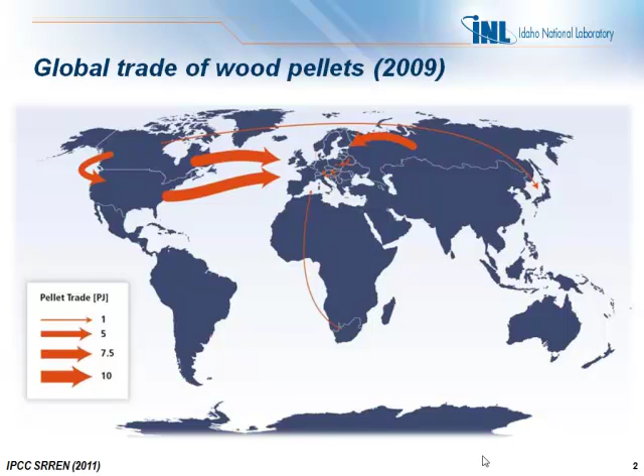So what does that mean for us in the U.S.? Because it's a significant resource leaving our shores and going overseas to support their energy needs. Well, I think the obvious reason for that is that, as talked about by previous speakers, we don't have policy in place necessarily or subsidies in place to support that market. And without the support of those subsidies, that pellet industry just doesn't pencil out in the U.S. And even though they've overcome some of the barriers, they haven't overcome that final cost barrier.

But as we talk about biomass in general, there are certain things that we have to understand that make biomass limited in terms of market. And I think all of the speakers talked about many of these topics. Handling attributes and conversion attributes. So we deal with both. We deal with the first directly in terms of logistics and how do we tackle biomass, reformat it, engineer it, if you will, into a product that can be used in power or fuels production or chemical production.

But we also look at the conversion attributes and the numbers that are listed there, because we need to understand, or the conversion side of the house needs to understand, that what we do to the biomass can affect their process, either favorably or not favorably.

And so we have strong ties with our other national labs, sister labs that do conversion, and other agencies that do conversion work to now start to put standards or put markers out there that we're trying to hit, targets to make sure that the conversion process fits within what we're capable of creating for them. And it's one of these where eventually we'll join in the middle and we'll have a solution to that problem. But there's many things listed there that prevent us from doing that.

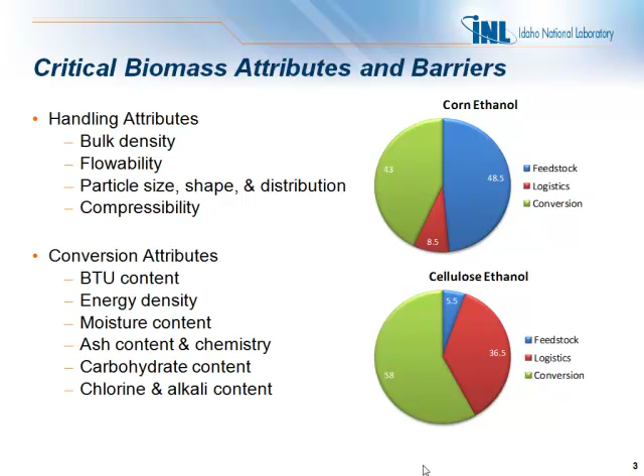And so the issues that we are facing is how do we squeeze more out of that 36.5%, and how does the conversion squeeze more out of their 58% to give more back to the growers? And this piece here is our logistics challenge that we're trying to find solutions to, and it all encompasses these barriers at very high levels. There's more nested under those, of course.

So what do we look at today? And again, my apologies, Jared and I, the program since 2000 had a much stronger background in the ag residue. It started because we were buttoned up against the corn ethanol, and we were trying to make more value add out of the corn ethanol businesses. So this integrated biorefinery was the starting place. And as we move forward, the forest products industry is more mature in the sense of utilizing its feedstocks for higher value products than, say, the wheat straw or the corn stover or other things. And so there were higher barriers, and we come from that background.

But as we move into the woody arena more, these same types of philosophies still hold true, and we're developing the patterns, as Jared pointed out, both in modeling and in research data to support where we're headed with this. So in this graphic, and Jared showed this and talked a little bit about what we're doing, in a conventional system we use this as a baseline because we have a forage industry that moves residues around for livestock, and we have a wood products industry and to some degree the pulping industry and other things that move forest products.

Most of those are higher dollar merchandisable saw logs or timber or pulp. But in terms of how do you access the material and bring it to a location, the baselines exist. We knew that they existed, and we have sort of what it looks like in a snapshot.

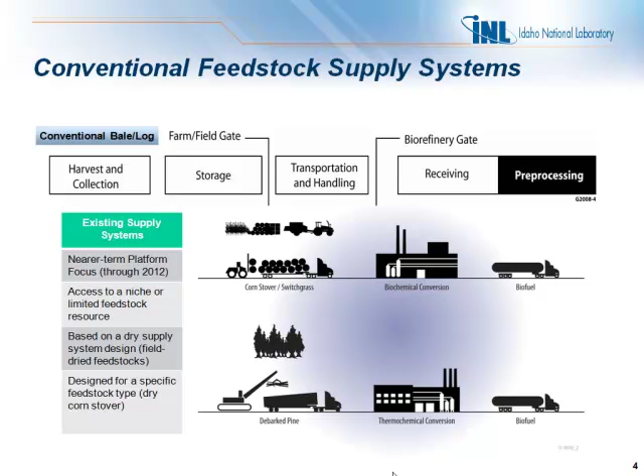What we're changing now as we move forward in terms of thinking about the logistics is we're removing pre-processing for the most part from the biorefinery gate and shifting it forward so that more of that operation occurs around the farm and field gates. And in doing so, you start to tackle the issues of bulk density, energy density, some of those major transportation barriers, and also stability, such as moisture management, and even some of your quality. You can start to attack that there.

And so we talked about biochar, some of the products that come in, and imagine the logistics. If you haul everything to some biorefinery and you make a value-add product that really belongs back on the soil, back with the growers, you have to transport all that back to the growers, and so you're causing another logistical issue. And so the philosophy is that right here, two things: very low bulk density, very broad diversity of feedstocks.

Who better to deal with diversity of feedstocks than the landowners? They rotate crops, they rotate species, they understand their land, so they handle diversity on a daily, yearly basis. So we leave the diversity up front, and we start to funnel the process right through here, where we start to stabilize, densify, add value, take products off that might have value to go back, shorter distance. This transport, Jared's slide showed it, but this, maybe 10 to 20 miles is all. It's local, it's industrial, however. It could be at an industrial scale.

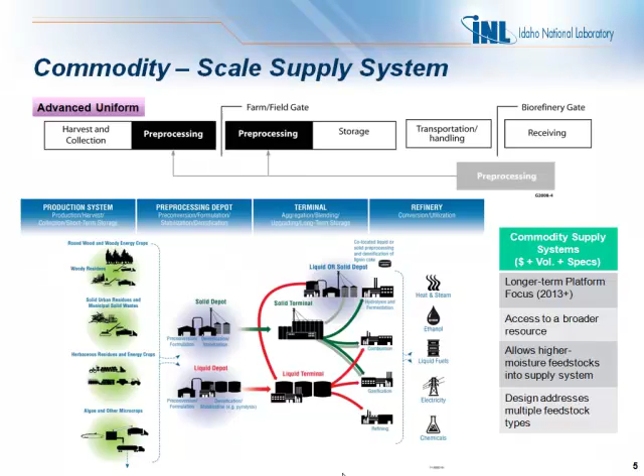So this graphic again shows this funneling where you have a lot of variation and now you have specification. And you want to deliver a product that meets a certain specification at conversion. And the two areas in which I particularly think are important is solving barriers associated with cost-effective long-term storage, so you can store more than a year.

This comes into strategic storage. We have strategic oil reserves. If this is truly an energy security issue, then eventually we're going to have strategic biomass storage reserves so that we can get to them when we need to. You can only do that if you can store long-term.

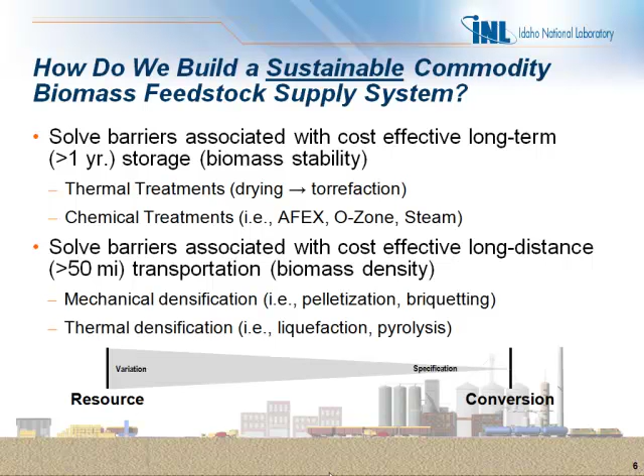And then, of course, solving barriers associated with transportation. So this 50-mile radius barrier that we face, we got to punch through that ceiling and be able to move this much further for the same cost. And that's all associated with getting the product into these specifications and solving that earlier on in the supply system.

So we look at this in 5 specific areas. One is the raw biomass development. So there's plant biotechnology. Many of the USDA ARS stations are looking at this. I visited a site down in Georgia that's doing a lot with the high-yielding energy crops. Very impressive work that they're doing in engineering the plant from the biotechnology side of things.

And then we pick it up on the harvest and collection and storage side, which is still a raw biomass development work. What do you do when you first contact the material and start to bring it in the front gate? Once it leaves here, this is where we can start to industrialize the process, but still leave it close to the field, where we can start to pre-convert the material through thermal treatments or other chemical treatments, where we might formulate the material, in terms of blending feedstocks together. They have the ability to catalyze each other, and densification. I shouldn't go too deep because I have a slide on each of those.

So if we start with pre-conversion and we look at mechanical, thermal, and chemical, there's various things that can be done to affect the biomass and to add value, to change its composition, to change its flowability, to change its grindability. All of these can impact, if it's in the correct order, how and what you might do to reformat that biomass. So everything from size reduction and separation in your mechanical work to deep drying and torrefaction.

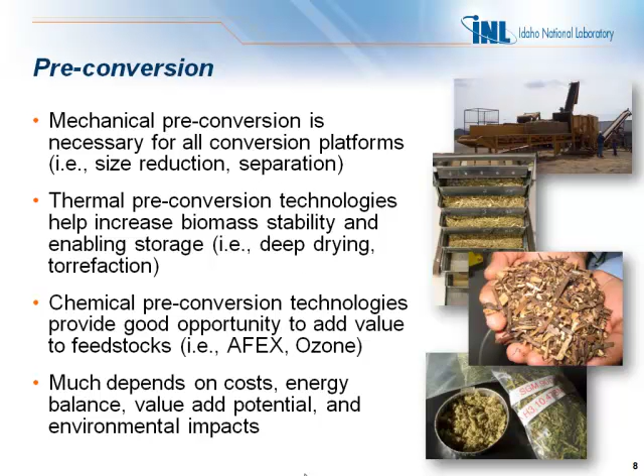It was talked about earlier. Torrefaction is just a continuum along that line where biochar and other things fit. You can do other treatments. This is an ammonia treatment, AFEX, ozone, other chemical treatments that also change the structure and add value. But, of course, all of this depends on cost, energy balance, value add potential, and environmental impacts. Yeah, there's always something you have to balance. But if you can balance these and get value out of them so that you can reduce your costs overall, that's the objective of doing these within the supply system.

Formulation, as I mentioned again, has the potential of taking your raw ingredients. And now, if you're not fixed to a 50-mile radius, you might be able to bring in multiple biomass streams. It could be ag, it could be forest, it could be other dedicated crops coming into the same facility and blending those feedstocks.

We had a workshop a little over a month ago that Scott was able to attend where we were doing a blended feedstock prep. And what we found with some of our sister labs is the activation energy necessary to cause reactions to occur, depending on the blend of feedstocks that you put in there, was actually causing a catalytic reaction, so that energy was starting off early on with one particular component, and it was starting that chain reaction with other components.

So if you looked at them separately in their reaction rates, they would lag behind, but you combined them and you put them into the conversion process, and they were starting to actually energize each other and make that process faster. And so the idea here is blending either right at the source or when you're feeding it in, and the whole idea that your fractions can catalyze each other. That's a new concept that we're developing to look at how biomass can help each other, and you can gain from incorporating more resources than one.

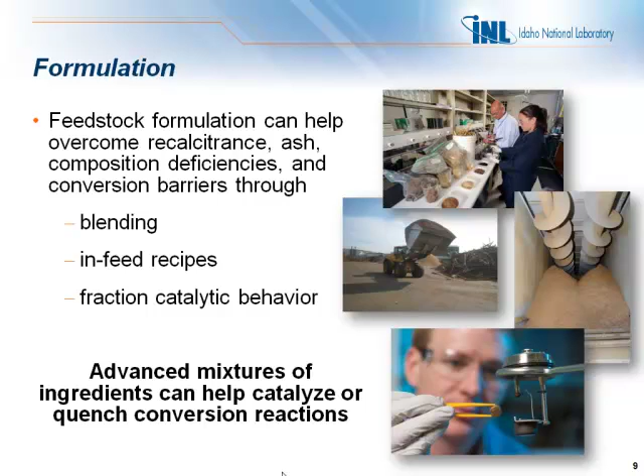And finally, densification, and I think that needs no explanation. If you can't have a high enough bulk density and energy density, you're not going to move it very far economically. And so the idea now is to take it from a strictly logistic standpoint and go through mechanical densification processes. But the other idea is there's a lot of pressure and heat that comes into the densification process. So we're looking at what types of heat and pressure might we use after we formulated it to catalyze that process while we're densifying it and actually cause a reaction to occur that will make the biomass better.

My boss, my department manager, likes to look at it like this. Your deconstruction is kind of like gathering your raw materials. Say you're making a stew, and you know that carrots and peas and potatoes all cook at different rates, so you've got to decide when you're going to put them in the cooker and for how long. And then you blend your recipe. What do you want out? You want a nice chili? Do you want a nice beef stew, carrot stew, or do you want clam chowder? Well, you put your formulation, your recipe together, and then you cook it, and that's a densification process. You put it all together, and you put it in your final product, and you serve it up.

Each of them have a different end result and a different need, but if you understand your ingredients and what causes each of them to do what they need to do, then you can basically come up with the end product that you want, and that's what your biorefineries are going to start to request. I want a certain product or a certain feedstock that makes my process most efficient, or at least that I can dial in and make my process efficient.

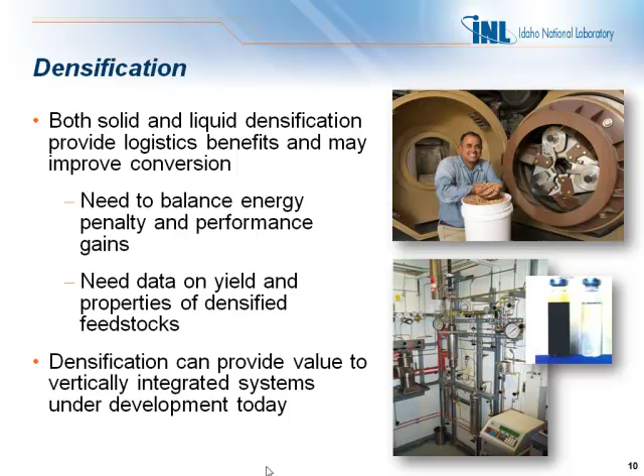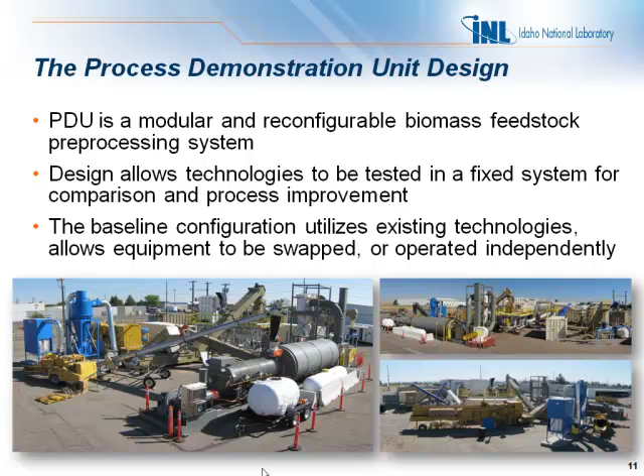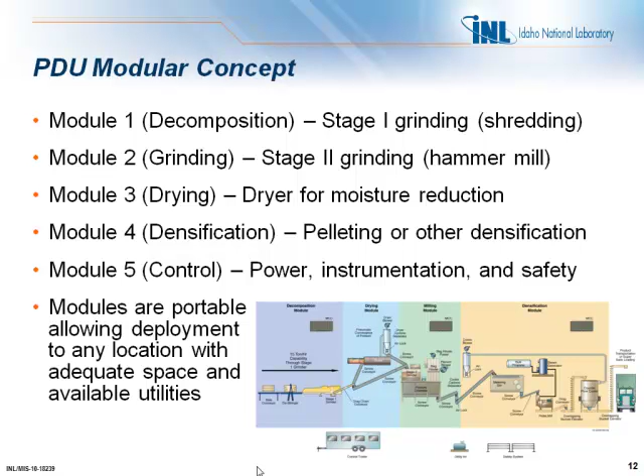So the Idaho National Laboratory, through the work of the Department of Energy, has developed a process demonstration unit, and this is one of many process demonstration units that exist within the Department of Energy. We use this to gather detailed information that we can share and validate models and move our process forward. So this is where we do the formulation, densification, testing, and try to push that envelope that we'd like to accomplish. The components of that are listed here. Again, I'll let you peruse this, but it's modular, it's reconfigurable, so as we get industry that wants to put equipment in, we can swap out different equipment at different times to try to keep up on that technology curve and demonstrate what the capabilities are.

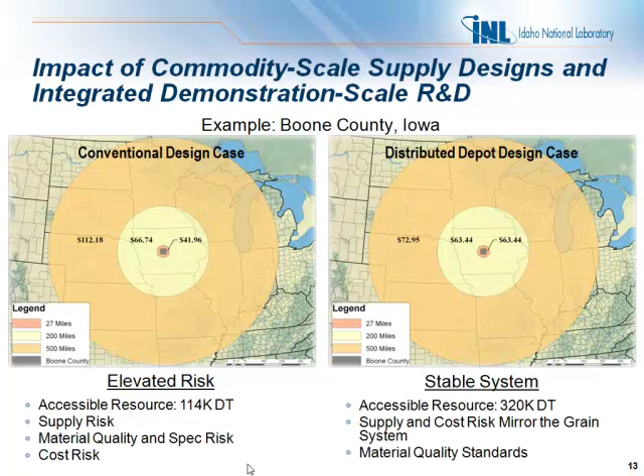And Jared showed this, and the point here again comes back to the risk. As we do this work, our biggest focus is how do we move biomass further for lower costs? How do we move for $72 what today costs us $112? And what's the formulation so that when it gets there, it's really worth that $72 because the conversion process can lower their costs. They have a better feedstock. And if we can do that, then we're going to meet a lot of these enabling things to the industry, such as minimizing logistical barriers, smoothing the costs across the country, reducing the supply and financial risks, establishing standardized specifications that biorefineries can count on, establishing local processing for rural development and economics. And then the last two really are market developers for local markets for multiple biomass use.

And then with our international work, we're even looking at, if this is a true commodity, and we're doing this today to some degree, the U.S. trade, but we need to get this so that it's competitive and we're not mining our own resource, but we have a strategic plan as to how we're going to trade commodity biomass in its raw form. And so that's kind of a snapshot of the INL.

And I was interested to know, we pelletized 15 tons of switchgrass for Jonah, and I hadn't heard from him since I knew the company had broken up, so I'm glad to hear he's still in business. We might have to contact each other again. So it's a small community. I hear names that I'm familiar with and appreciate everybody's work, and that's my presentation.